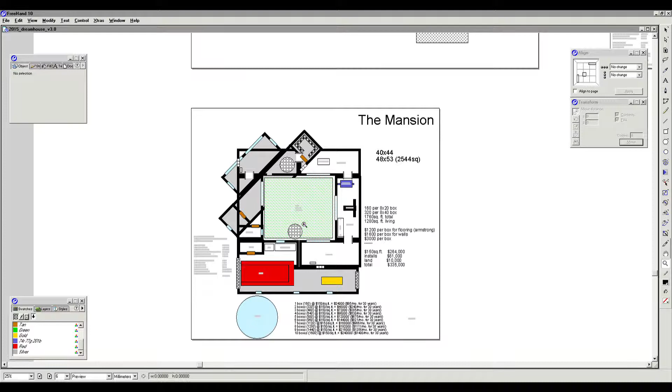This was the price-is-no-object idea, where I thought, okay, if I could make anything, what would I want to do? Now, I have mentioned before that I was thinking about doing this out of shipping containers. That just seems logical to me based upon where the home is being built.

When you're building a home in earthquake country, you'd have to be kind of crazy to build a house out of wood when you could build it out of steel and something like shipping containers, which will not collapse on you once the ground inevitably starts moving.

So this was the first idea. There was a rock garden kind of in the middle, and the garage over here. I could fit a truck there, and right here you can see there's a garage door. And these gray boxes represent a second floor.

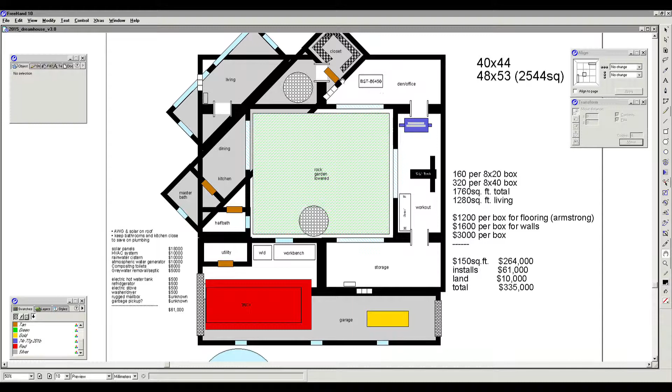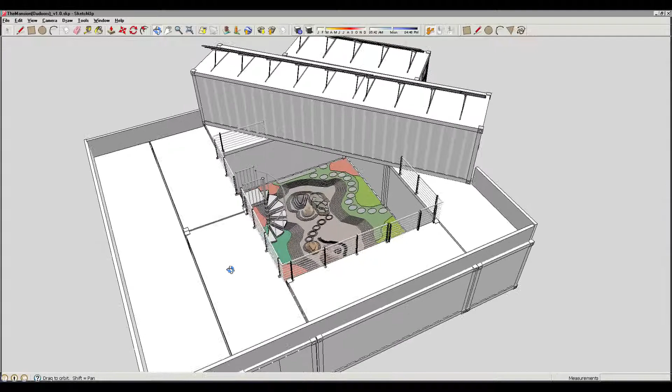Well, it's kind of difficult to show you this in 2 dimensions, so let's go here, and we'll now show you what it looks like in 3 dimensions. This is a really cool program called Google SketchUp, which you can get for free on the internet. It allows you to build 3-dimensional models and pan and zoom around them, and do little layouts to, as the program name implies, sketch up some ideas.

So the whole point is that you would take this and give something like this to an architect and discuss final ideas of what you really want to do. You don't build final blueprints off of this, but it is actually a good way to show an architect what you are intending to create.

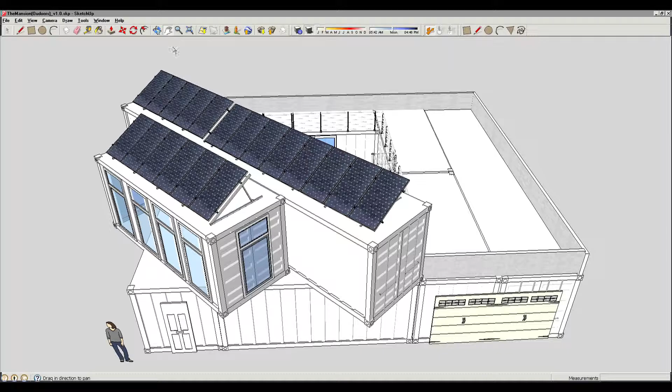So this was my first idea, called the mansion. As you can see, there'd be a lot of windows on the second floor. There would actually be no windows on the outside, and all the windows were going to be inside this rock garden. But as it turns out, this is way too big.

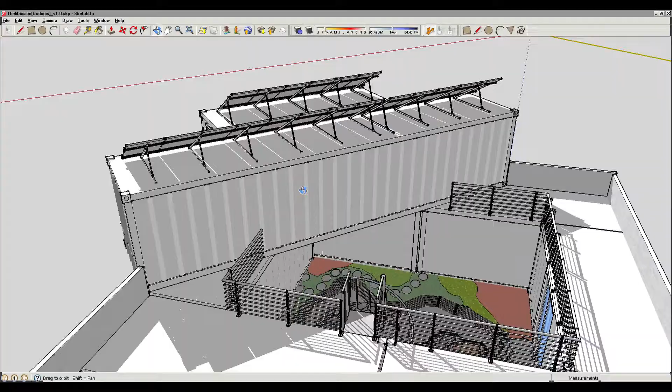I don't need something that large, so we'll show you one of these smaller designs. Here we have the Vista and the Mini Vista, which are basically the exact same thing. One just happens to be a little bit smaller, hence the term mini, right?

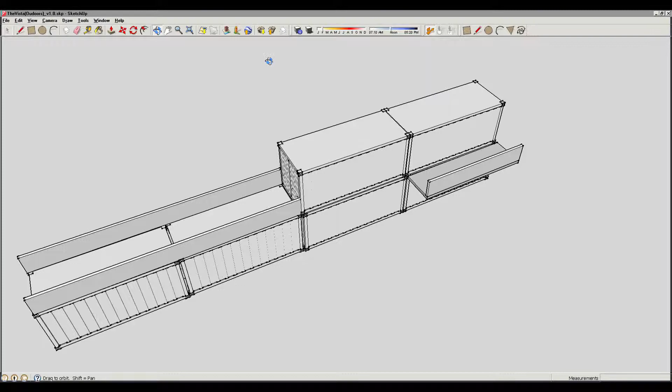Well, once again, let's just show you the 3D version. So this is kind of what the 3D version would be like. Now, this one I didn't fill in everything. Obviously, there would still be another railing right here, and there'd be more railings here, and then there'd be another thing here.

Here's the Mini Vista right here, which is kind of the same idea. You can see, once again, I didn't put it all in, like all the railings and stuff, but the idea would be that there would be a sliding door right here, which would lead out to this little balcony. Then you could take these stairs up to this, which would have a railing all the way around it, so that's sort of a top floor observation deck.

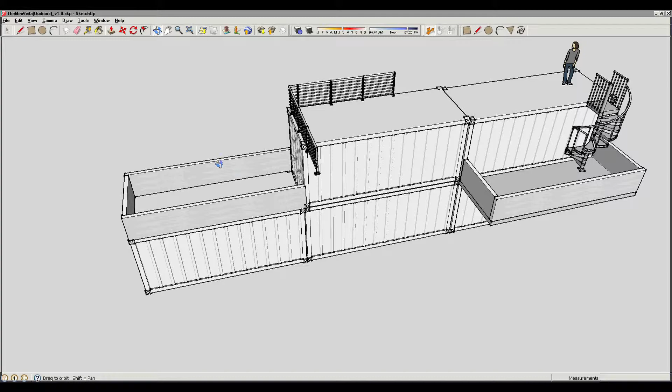And then there's another deck right here. I didn't obviously put in all the windows on this one either, but once again, it gives you an idea of the sort of configurations and layouts I've been thinking about, so you have a much clearer idea of what the shipping container concept would end up looking like once all is said and done.